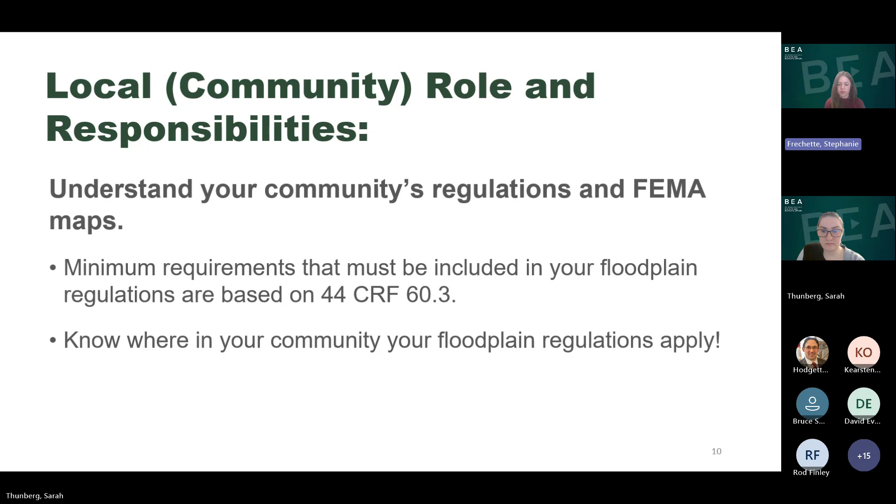Most communities in New Hampshire follow the minimum requirement that the floodplain regulations apply to all areas designated as special flood hazard areas or flood zones by FEMA's flood insurance rate maps. Knowing where those floodplains are in your community is critical as it's where your regulations apply.

Next, it's the community's responsibility to ensure that all local permits are applied for all development in the special flood hazard area. That includes the requirement that a permit issued by the community must be issued for all development in those special flood hazard areas. This does include building and non-building development as well. We're going to be talking about how non-building development is defined in just a few slides.

Additionally, for existing buildings in the special flood hazard area, ensure that a substantial improvement and substantial damage determination is being made for all existing structures when work is being performed or a permit is being applied for.

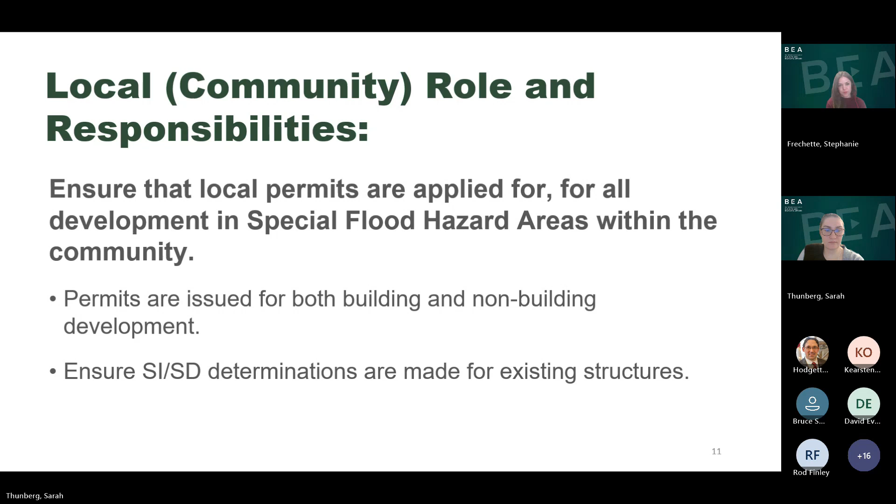Next, it's the community's responsibility to ensure that floodplain development is built according to the approved local permits and your floodplain regulations. Sometimes plans change during construction, whether intentional or not, but it still needs to meet your floodplain regulations at the end of the day.

An example is that a new structure is being built and the lowest floor is constructed an inch too short of the base flood elevation, or an existing structure is being improved that did not meet the substantial improvement threshold. But as renovations are underway, the property owner decides to do additional work that would then bring the structure to meet the substantial improvement threshold.

Finally, while it's up to the community to ensure those regulations are met, the community is responsible to gather and maintain records such as as-built elevation data for new or substantially improved structures in the special flood hazard area.

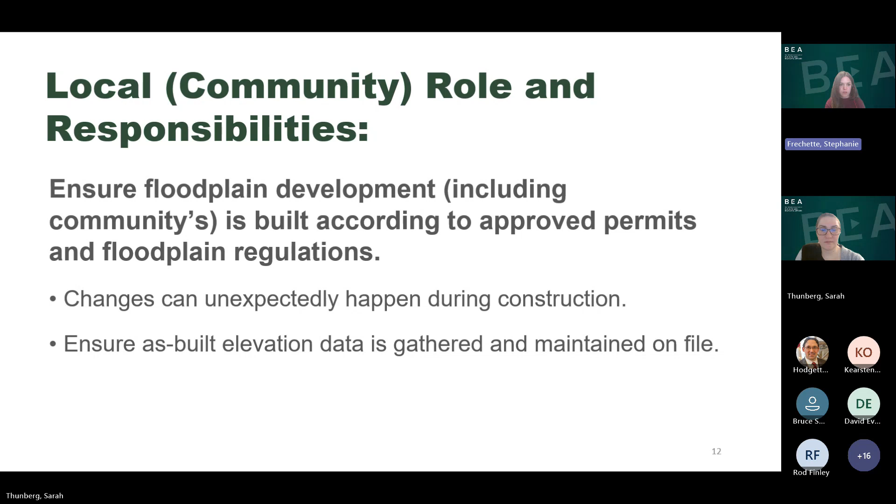Finally, the last local responsibility is that the community must take enforcement actions to correct any violations if they were to occur. Again, floodplain regulations are administered and enforced at the local level, so it's your community who's responsible for enforcing those regulations. Failure to enforce or correct any violation may jeopardize a community's good standing in the National Flood Insurance Program.

So now let's discuss some common violations. Most common violations can be grouped into two categories. One is unpermitted development in the floodplain, and the other is when development within the floodplain does not comply with the permit issued by the community. So let's get into it.

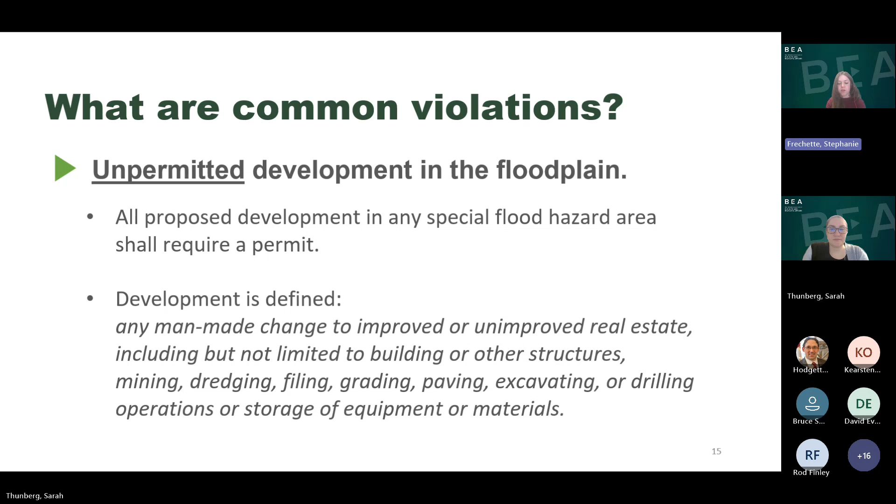The first type of common violations is unpermitted development in the floodplain. Any development in the special flood hazard area shall require a permit. Development, as defined in the National Flood Insurance Program, is any man-made change to improved or unimproved real estate, including but not limited to buildings or other structures, mining, dredging, filling, grading, paving, excavating, or drilling operation, or storage of equipment or materials. So, in summary, if any building and non-building development is happening in the special flood hazard area, then a permit must be issued.

Here are some common examples of unpermitted development in the floodplain. A common one is structures that are either being constructed or were constructed without a permit. That also means that they may not meet the building requirements included in your floodplain regulations.

Another example is improvements to structures without a substantial improvement determination. Every existing structure in the floodplain must have a determination made for any improvements that are performed. There are a few exceptions to that rule, but overall, that determination is always needed.

Similarly, repairs to structures without a substantial damage determination. Remember that needs to be made for all damage caused by any origin, not just flooding. So a fire, a tree falls on the house, a truck runs off the road into the building - that determination needs to be made. Placement of fill,

this is a common example of non-building development in the floodplain. Although it's not a structure, it needs to be permitted and meet any watercourse requirements in your floodplain regulations. And same with excavating of earth or materials and storage of equipment or materials. This non-building development requires a permit and must meet the watercourse requirements in your floodplain regulations.

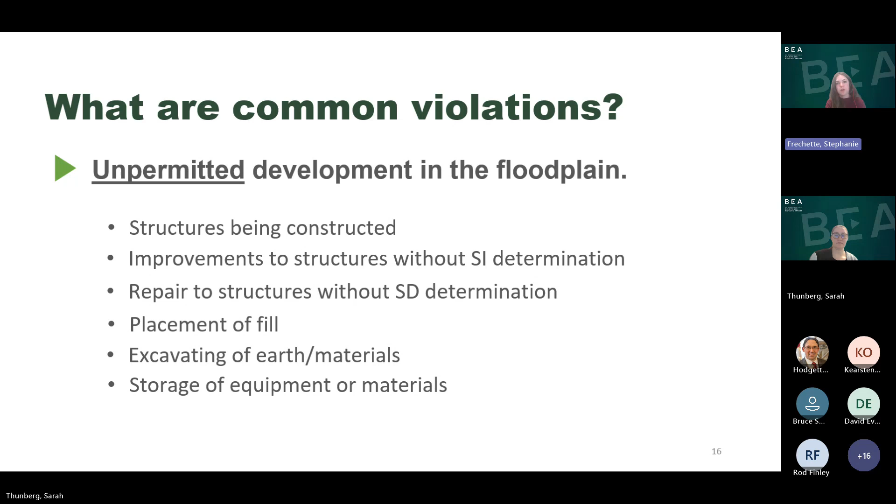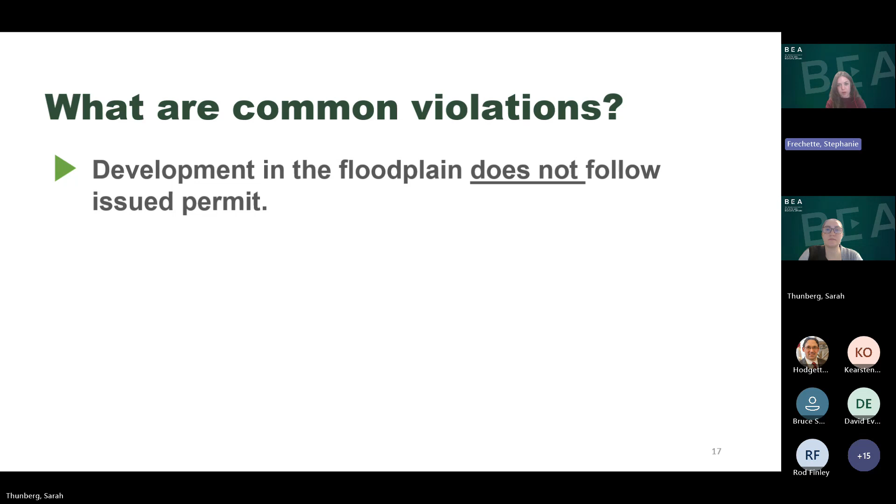The second category of common violations is that development in the floodplain does not follow the permit that was issued by the community. We're going to spend some time talking about this type of violation in the following slides.

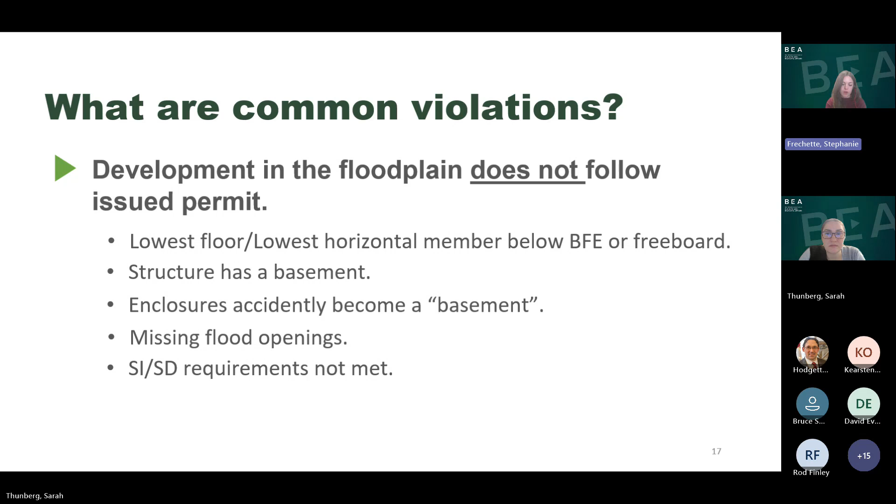A common violation is the lowest floor for A zones or lowest horizontal member for V zones is below the base flood elevation or any freeboard a community may have.

So as adopted in your community's regulations, for A zones, which includes flood zones A, AE, and AO, the top of the lowest floor should be at or above the base flood elevation or the design flood elevation if your community has adopted higher standards. For zone V, which are in coastal areas, the bottom of the lowest horizontal structure member must be at or above the base flood elevation or the design flood elevation.

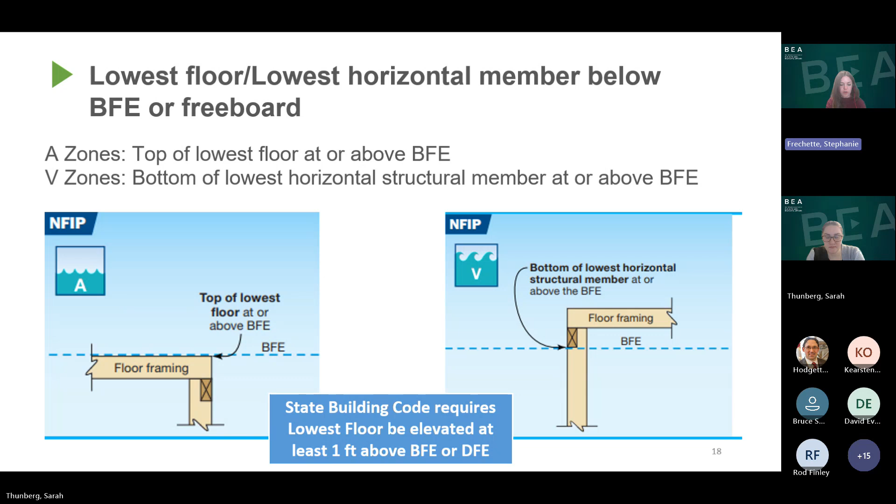Now, this is an approximate. The as-built elevation data provided post-construction by the property owner should ensure these are at the base flood elevation or higher. Also to note, for communities that have adopted or enforced the state building code, while not NFIP minimum requirements, please be aware that the code requires at least 1 foot freeboard above the base flood elevation or the design flood elevation be required for residential structures.

Another common violation is that a structure has a basement. A basement is defined by the National Flood Insurance Program as any structure with an enclosed below-grade area on all four sides. On any new construction or substantial improvement, this is not permitted in the special flood hazard area. This is to avoid a bathtub effect where water would flow in and not be able to flow out, affecting the pressure and forces on the structural integrity of the structure.

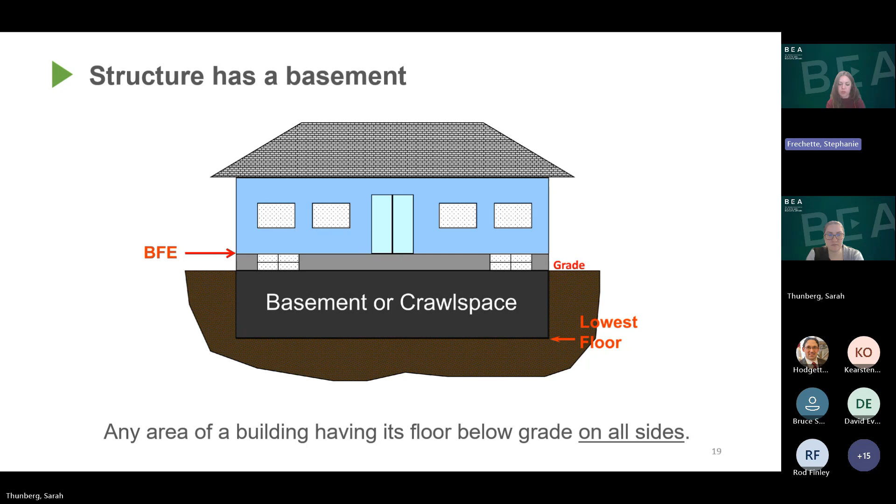Just to clarify, this is for new construction or substantial improvement of structures in the floodplain. If a structure is in the floodplain and has a basement, depending on when it was built or what work has been done, a basement doesn't automatically equal a violation. It would just be for any structure built after the community joined the program, and any substantial improvements determined on that structure regardless of age.

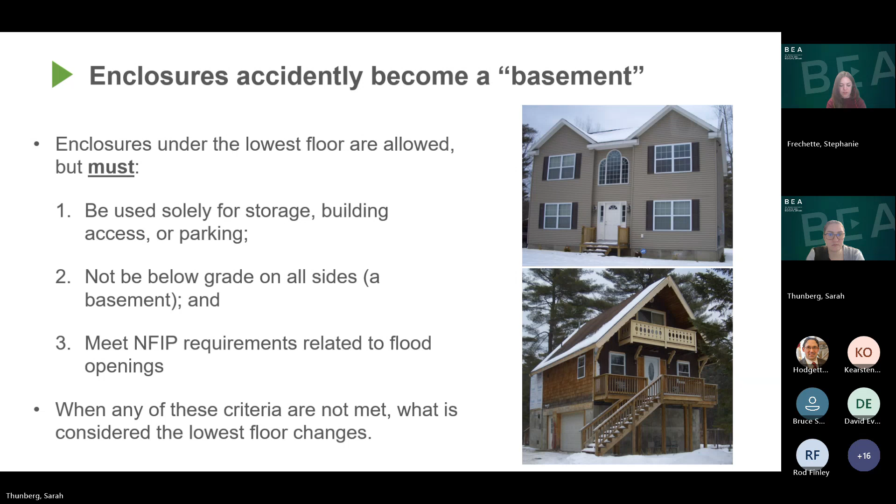For V zones, which are coastal, enclosures have a slightly different requirement. That space must be free of obstructions or constructed with breakaway walls, open lattice work, and again be used for parking, building access, or storage.

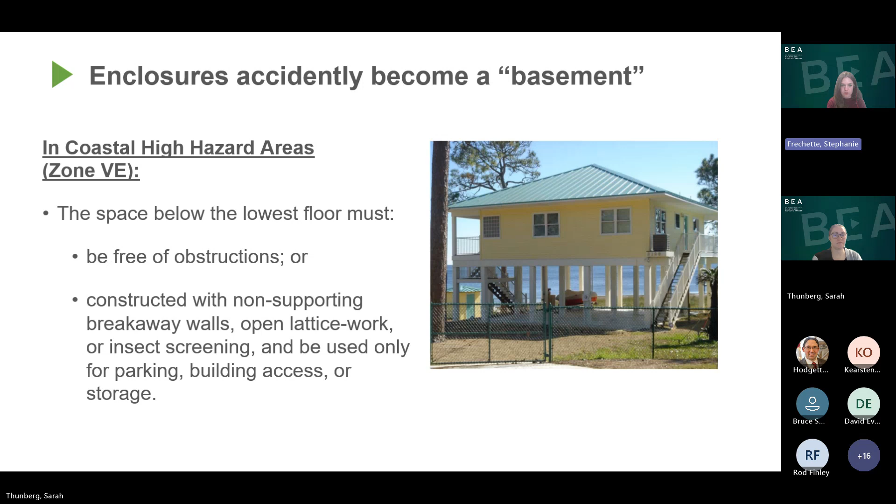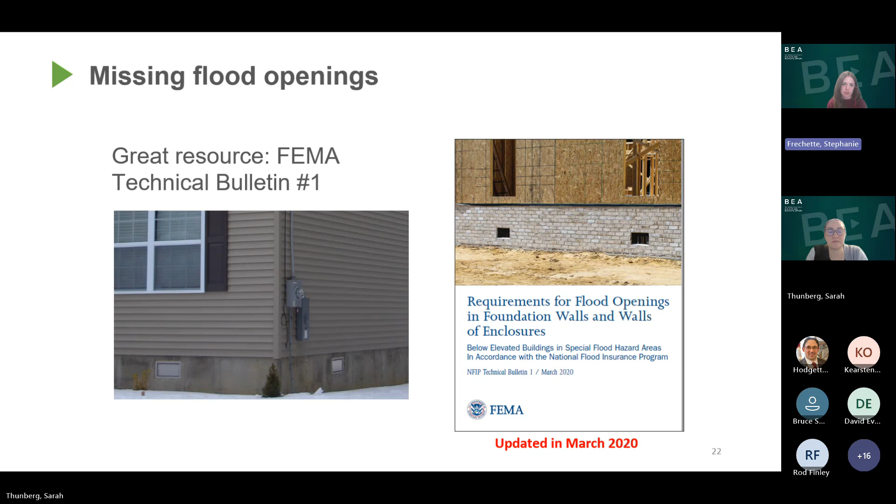Another common violation is that an enclosure is missing flood openings. If a structure is elevated to the base flood elevation or above in A zones, enclosures are allowed to be below that lowest floor with proper flood openings installed. FEMA does have some good resources on flood openings in foundation walls and wall enclosures, and we have more information on our webpage with technical bulletins that you can reference.

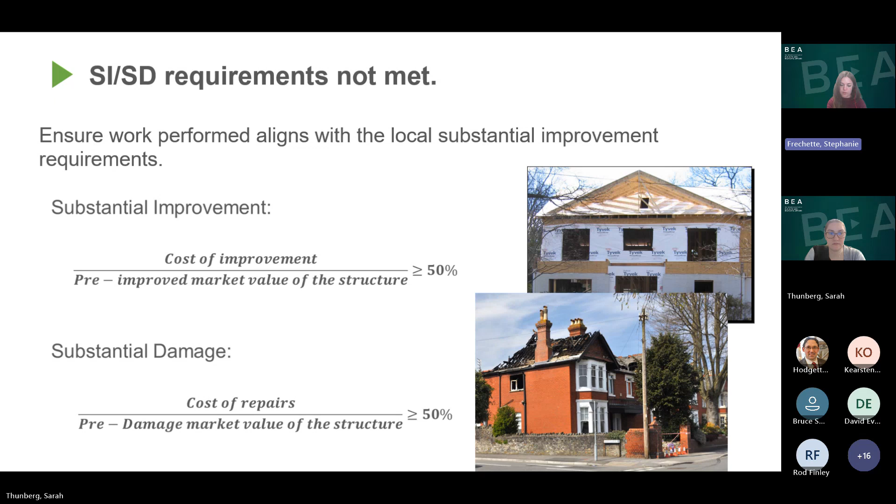You should be aware of any intentional or unintentional changes to the proposed scope of work, as that could change the determination. The substantial improvement and substantial damage desk reference is a good resource to learn more about these requirements.

The final common violation we're going to look at is recreational vehicles not meeting the requirements of your floodplain management regulations, or no longer meeting these requirements.

The rule for recreational vehicles is that they must be on site fewer than 180 consecutive days—yes, that means it can be driven off one day and back the next. It must be fully licensed and ready for highway use. These regulations are intended to ensure that if flooding were to occur, the vehicles could be moved quickly out of the area. This also means there can be no permanently attached structures to the RV either, like a deck, for instance. So if these requirements or criteria are not met, then the RV must comply with the requirements for a manufactured home.

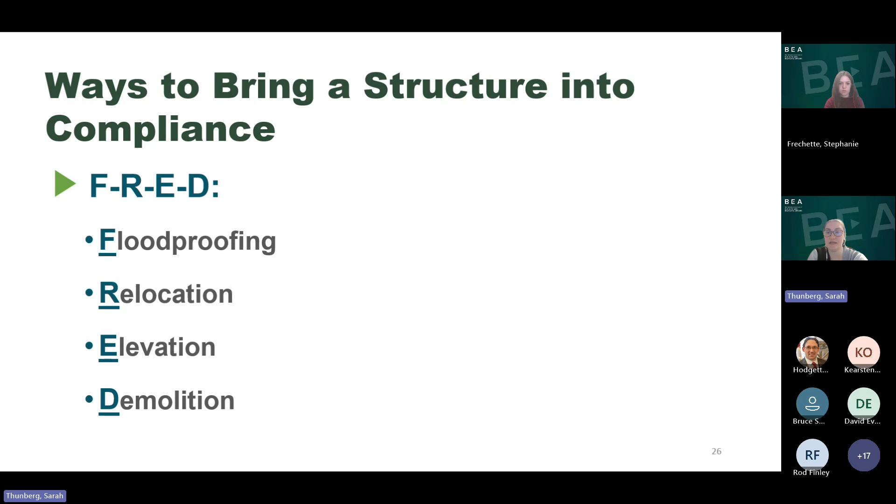So one of these four techniques is called floodproofing. There are a couple options for floodproofing depending on whether you're looking at a residential or a non-residential structure.

Dry floodproofing is primarily used for non-residential structures in A zones, while wet floodproofing is typically used for residential structures, enclosures, garages, and accessory structures. Dry floodproofing is not permitted in Zone V.

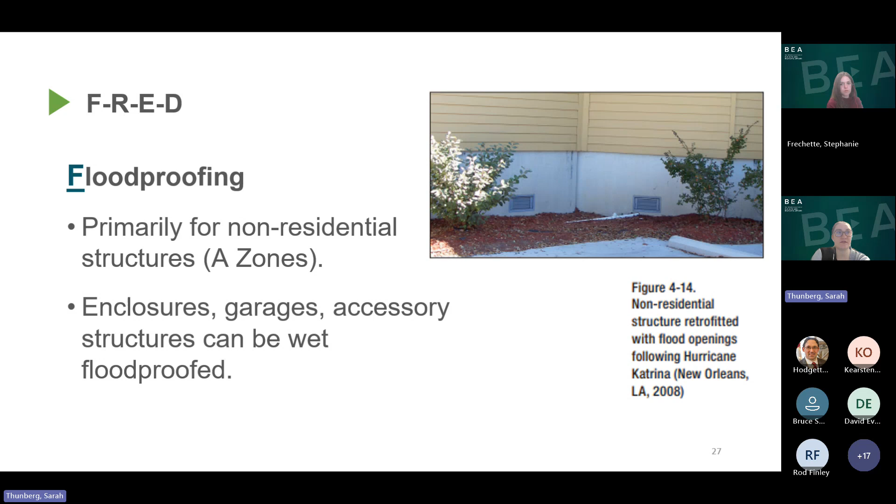However, there are some technical bulletins through FEMA that go over the best practices for dry and wet floodproofing. Dry floodproofing means a combination of measures that make a building and attendant utilities and equipment watertight and substantially impermeable to floodwater, with the structural components having the capacity to resist flood loads.

Wet floodproofing means the use of techniques that allow floodwater to enter and exit automatically to minimize unequal pressure on the walls. The structure will get wet, the flood waters will come in, but wet floodproofing offers an option for that free flow of water. Typically these are used through flood vents. And again, dry floodproofing is not an option for your coastal V zones.

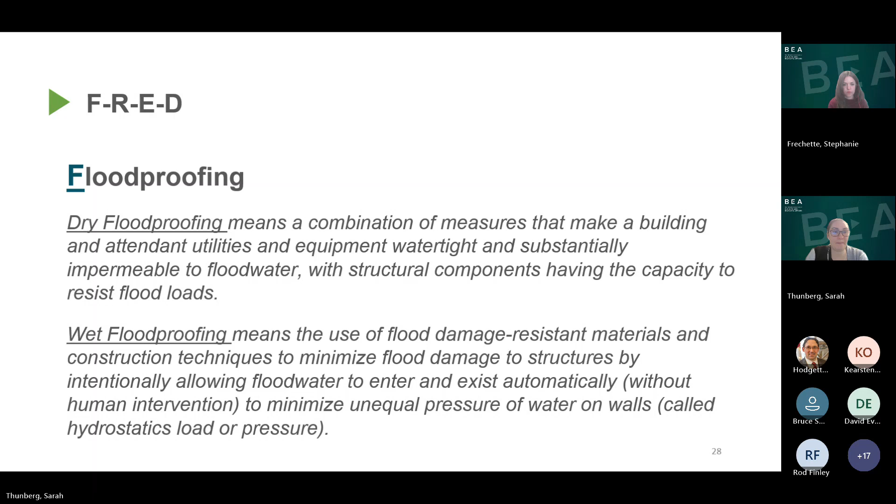Non-residential structures are permitted to be dry floodproofed through your local regulations. If so, floodproofing designs must be certified by a registered design professional, typically a registered engineer or similar. Any community should utilize the floodproofing certificate for non-residential structures for this purpose. FEMA has a floodproofing certificate for non-residential structures. If you're not sure where to find that, I believe we also have it on our website, but you can reach out to me and I can direct you to that certificate.

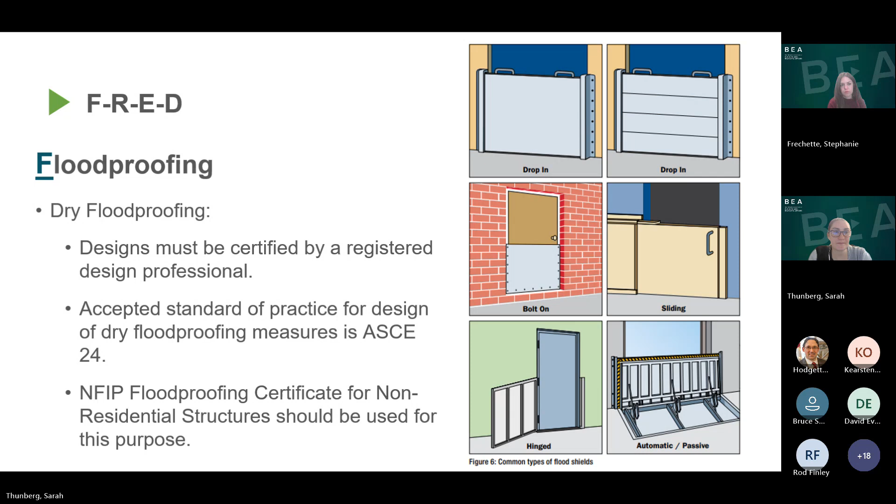Some examples of dry floodproofing methods include temporary installation of waterproof membranes to prevent water from entering a structure. So that would be if you have a mall, for instance, and you are able to put slats in the doors to prevent any flow of water through the doors. That would be one example of dry floodproofing.

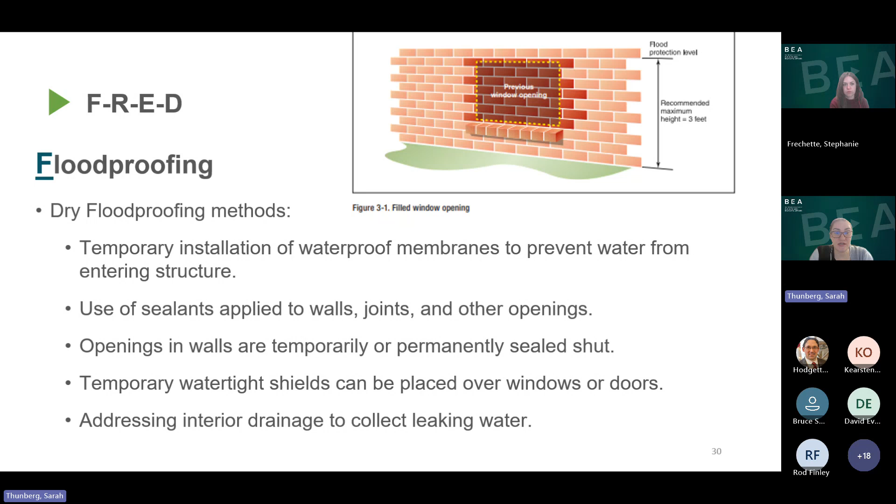Then there's use of sealants applied to walls, joints, and other openings. Then also you can have openings in walls that are temporarily or permanently sealed shut, or addressing interior drainage to collect leaking water.

Now, wet floodproofing can be used on enclosures below elevated buildings, again with the use of flood vents, as we previously discussed. Wet floodproofing can be used on attached garages, agricultural structures, accessory structures, historic structures, and for functionally dependent uses when it is authorized through a variance.

Again, the functionally dependent use is a use which cannot perform its intended purposes unless it is located or carried out in close proximity to waters. This term includes only docking facilities, port facilities necessary for the loading and unloading of cargo or passengers, and shipbuilding and ship repair facilities, but it does not include long-term storage or related manufacturing facilities.

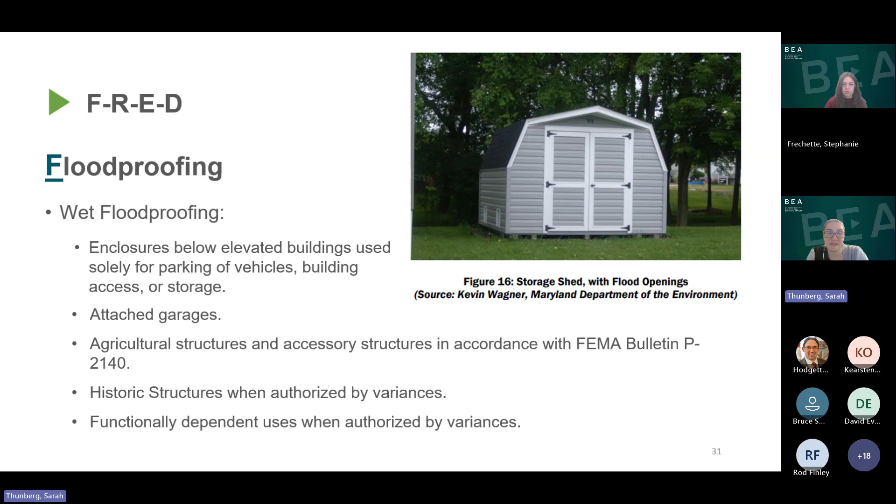All right, so let's talk about the next letter in FRED. That is relocation. Depending on the situation, relocation may be an option as it provides the greatest security when flood hazard is severe. It can also reduce flood insurance premiums, though this method may be very costly.

Relocation can be appropriate in areas where the flood hazard is severe, such as deep water, rapid rates of rise and fall, short warning times, wave action, high velocity flow, high debris potential, long duration flood events, and erosion.

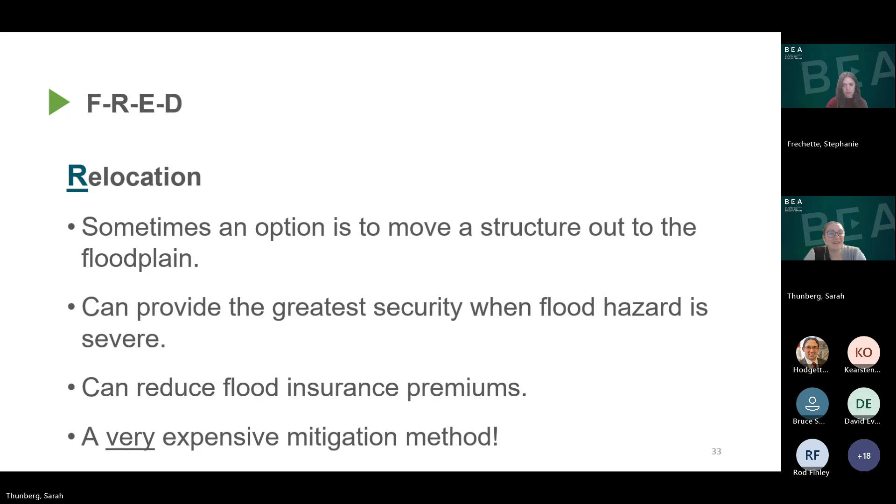All right, so the next letter that we're going to go over is elevation, E. This is to raise the building to or above the flood elevation level adopted by the community, but the building is still remaining on the lot it originally was in.

Depending on the specific situation, sometimes it's only the utilities or a portion of the structure that needs to be elevated to bring it into compliance. Typically, the process of elevating is to separate the structure from the foundations, raise it up on hydraulic jacks, and then put in temporary supports while a new or extended foundation is built below. It's a good method for structures originally built on basements, enclosures, or open foundations.

If a structure is determined to be substantially improved or substantially damaged, it may need to be elevated to be fully compliant. So this is something that could result as a requirement for substantial damage.

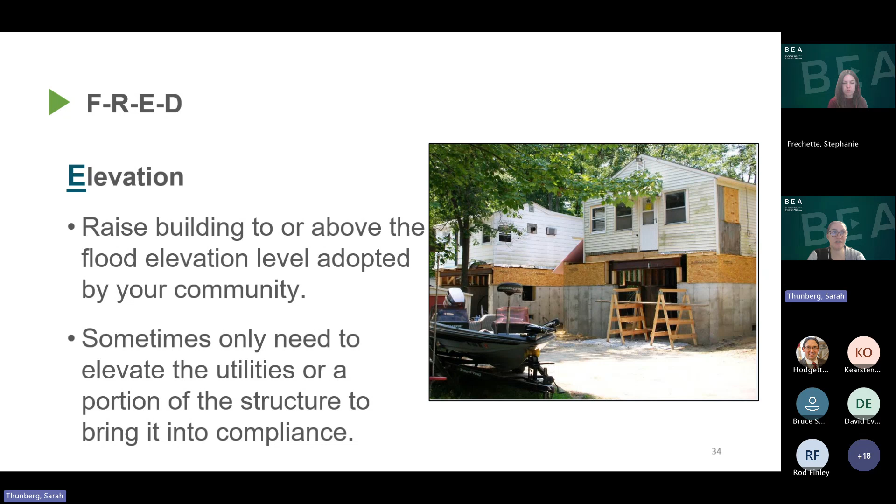Alrighty, so the last letter that we're going to go over for Fred is demolition. That's another option to reduce your flood risk. It is definitely the most extreme, because depending on the specific situation, especially if a structure is severely substantially damaged or severely and repetitively substantially damaged, this may be the easiest way to bring the structure into compliance is to demolish the structure. It can be a good option for any low-cost structures which are out of compliance, such as a shed or accessory structure. Then once it's demolished, if chosen by the property owner, a new compliant building can be built back in place, as long as it is raised and fully compliant with the community's NFIP regulations. This can involve filling in a basement, grading, and landscaping.

Also available to all NFIP policyholders is something called the increased cost of compliance, which can provide, I believe it's $30,000 for mitigation measures to bring structures into compliance. This is only available to structures which have been substantially damaged and there is a hardship, and the homeowner would not otherwise be able to bring the structure into compliance. The increased cost of compliance is some money available through FEMA for substantially damaged structures. But this is still an option on top of any insurance claim that they may receive for substantial damage.

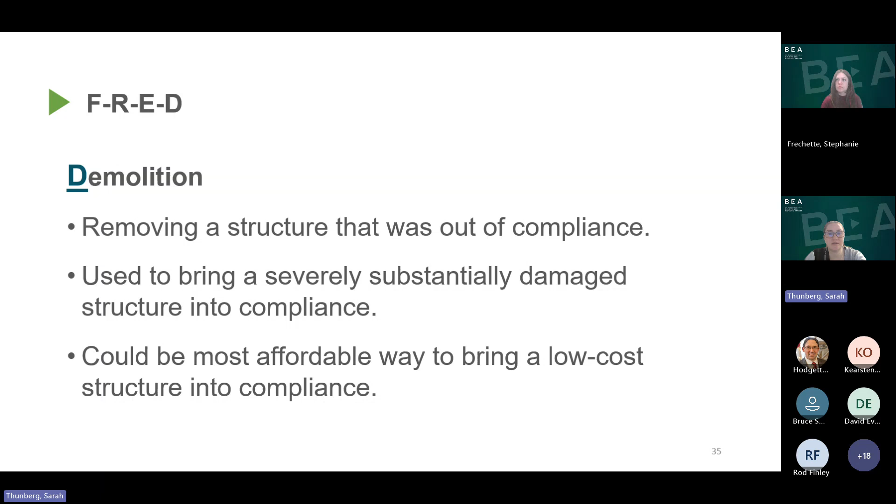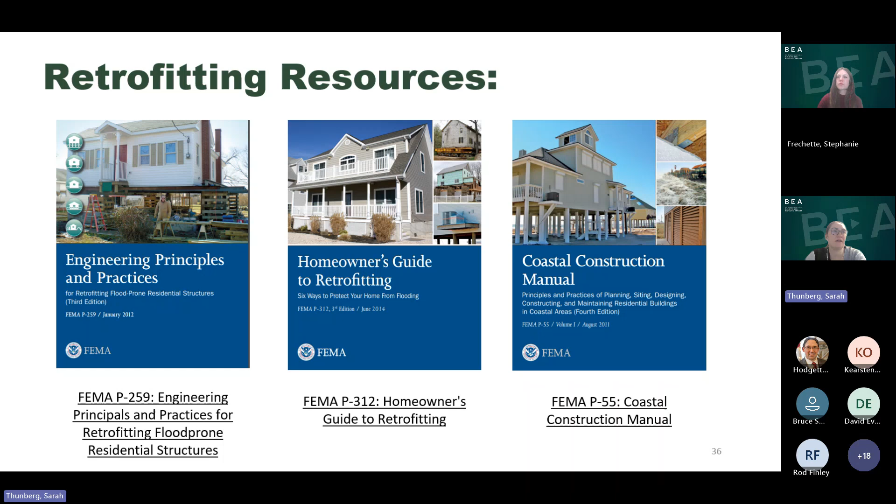All right, so some other tools that communities have for compliance is, well, first off, the biggest tool you have is to know your ordinance. These are your community's floodplain regulations. And while you don't need to know every property off the top of your head, you need to make sure that you know how to make a determination of if that property is in the floodplain, especially if it's near but you're unsure if it will be in the floodplain. Make sure that you have procedures written down to be able to verify whether or not there will be any floodplain interaction with the structure.

Also remember that FEMA is the only entity that can change the floodplain maps. I'm sure we've all heard, even myself, I get these calls almost on a weekly basis saying, I've lived in my house for 40 years, it's never flooded, the river's never come up near my house. But that doesn't mean that they're exempt from your local floodplain regulations. Only an official letter of map change in the form of a LOMA from FEMA can remove the property from floodplain regulations. That doesn't mean that you cannot build in the floodplain. You are allowed to build in the floodplain. That's why communities have regulations for how high can you have a basement. So this does not mean that you cannot build in the floodplain, but if someone is trying to get themselves removed, only FEMA is able to do that.

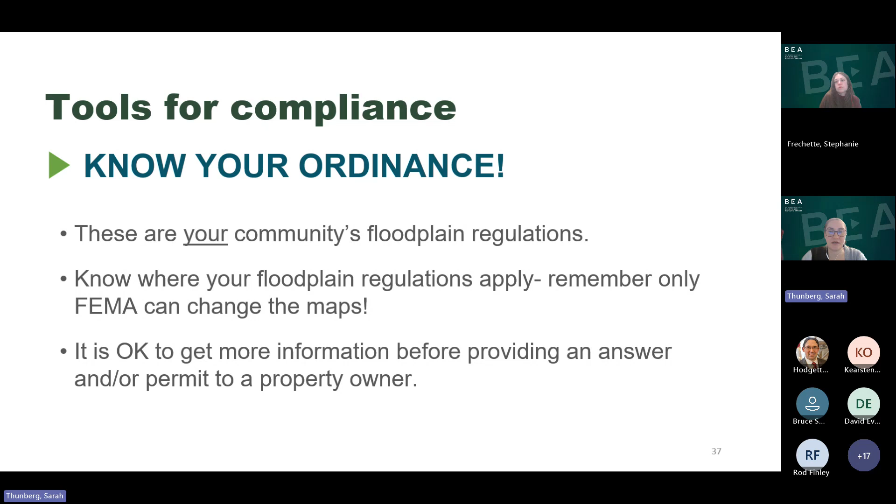There are also, as I've kind of said, a lot of FEMA publications and resources for making substantial damage and substantial improvement determinations. And yeah, so I believe on our website, we should have a fairly comprehensive resource page with all of the technical bulletins and different guidance documents that the state of New Hampshire has put out.

All right, so there's some other tools at your disposal to use. There is other documentation a community can require to help ensure structures are built and remain in compliance. The first is the community can consider adopting and requiring a non-conversion declaration for structures with enclosures below the lowest floor. This form could be completed by the property owner and kept on file for that property. If a community wanted to adopt this, I would recommend working this into some type of procedure that is followed, and then just being consistent with all property owners in the special flood hazard area moving forward. And that is key. You do want to be consistent from permit to permit, and make sure that you are scrutinizing every project equally.

Another document is what's called a no-rise certification. This is so development, both building and non-building, is only permitted in the regulatory floodway where there is no official or no rise of the base flood elevation. That does typically require a hydraulic and hydrologic study to prove, but this certificate can be another tool used to ensure that the community is meeting its floodplain regulations.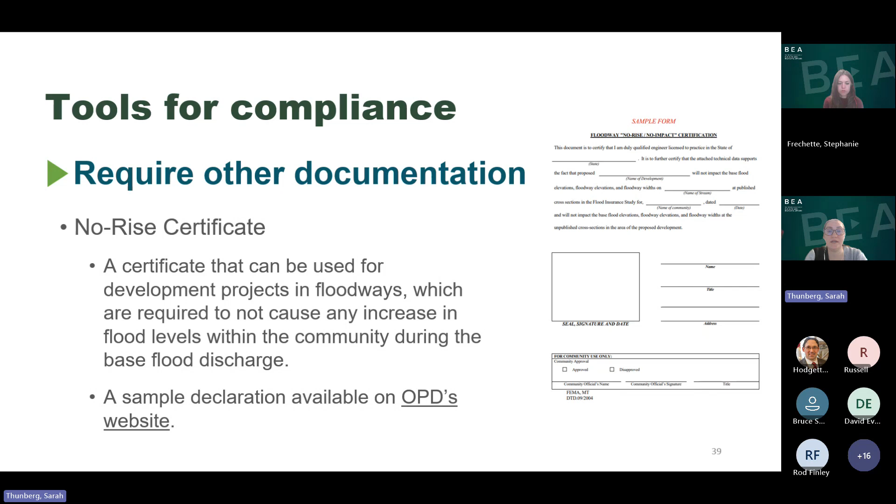As before, I would recommend that if a community chooses to adopt this form, have written procedures in some internal database, just noting the starting date of when you are using that as standard policy, and be consistent moving forward on when you require these certifications.

Another document that can be used is a flood opening certificate. This is to be used in situations where it is not feasible or desirable to meet the minimum opening criteria as detailed in a community's floodplain ordinance. This document, like ones before, must be signed and certified by a licensed professional.

All of these documents, since they are signed by a licensed engineer or surveyor, are ultimately the documents that your community has in your back pocket in case any issues arise with any of these structures. For some reason, if anything goes to court, these are your defense documents to ensure that you permitted and the community did all of their due diligence in permitting this.

The last document that I want to go over is a V-Zone certificate. It's a certificate that can be used to ensure that all new or substantially improved buildings in V-zones are designed, and the methods of construction to be used are in accordance with accepted standards of practice for meeting the provisions in a community's floodplain ordinance.

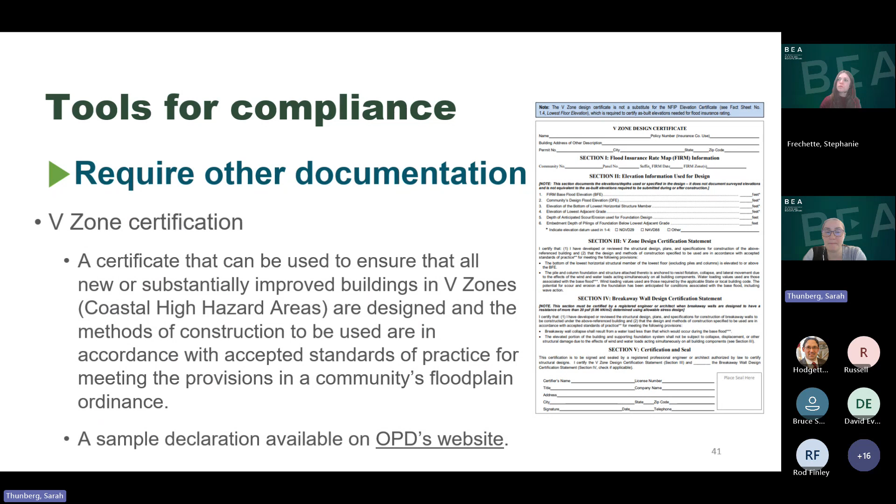Inspections are another tool that communities have to ensure compliance. It's often a way to catch compliance concerns earlier than once the building is completed. Typically, the best practice is to conduct a first inspection with plans in hand. You should determine that the site as identified on the proposed plans is consistent with the actual ground conditions.

Then a second inspection would need to ensure that the lowest floor will be built at the height stipulated in the permit application, and that the foundation is the type specified in the plans. Once the foundation is poured or laid, it can be very expensive for the property owner to change the building location or the elevation of the lowest floor.

Finally, the third inspection is done as the project is nearing completion. It ensures that the foundation and floor elevation have not been altered. It is also where you would want to obtain an as-built elevation or floodproofing certificate, verify that any enclosures below the lowest floor have adequate openings, check for floodway encroachments, and then also for V-zones, check if there are breakaway walls.

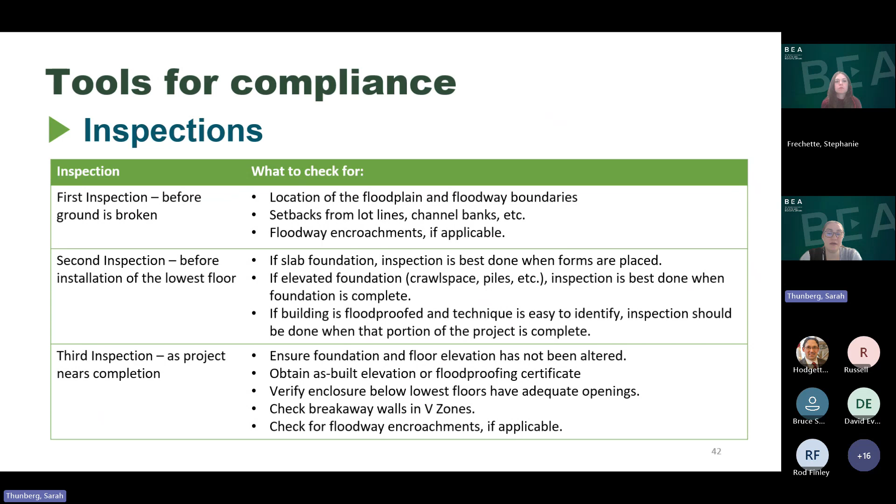I would also recommend considering taking photos during the final inspection to document compliance and retain them in your community's permit records.

You also want to think in the mindset of the property owner. The goal is compliance, but for the property owner, that could mean they only see dollar signs. Some tools you can use to incentivize property owners to bring their structures into compliance: first off, it's for their own personal safety, and your house will be better protected from flooding. You're hopefully saving money by not having to rebuild or fix damages due to flooding. It's also better resale value, and your flood insurance rates, while based on many factors, will mean lower insurance rates when building into compliance.

All right, so we're going to talk about some legal stuff now. The legal tools that your community has are typically in the form of fines, stop work or cease and desist orders, and also just withholding a certificate of occupancy.

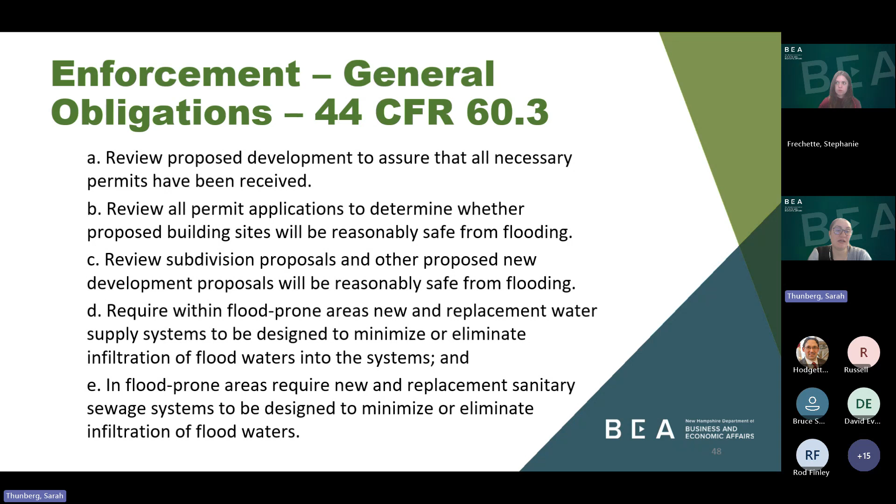You also want to require that all new construction and substantial improvements of residential structures within Zones A, used to be called A1 through 30 - there are still some A1 through 30 zones in New Hampshire, but they are mostly all getting converted into Zone A or AE at this point - have the lowest floor, including basement, elevated to or above the base flood level.

You also want to require that all new construction and substantial improvements of non-residential structures within Zones A1 through 30, AE, and AH have the lowest floor, including basement, elevated to or above the base flood level, or together with the attendant utility and sanitary facilities.

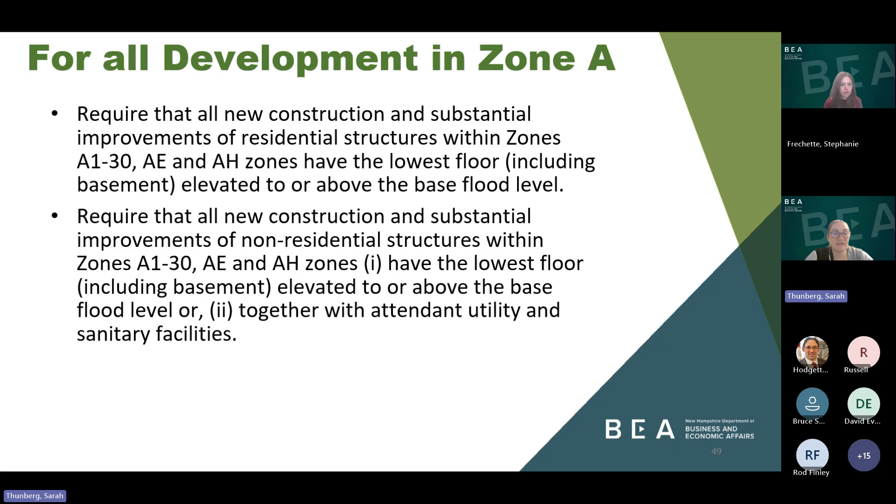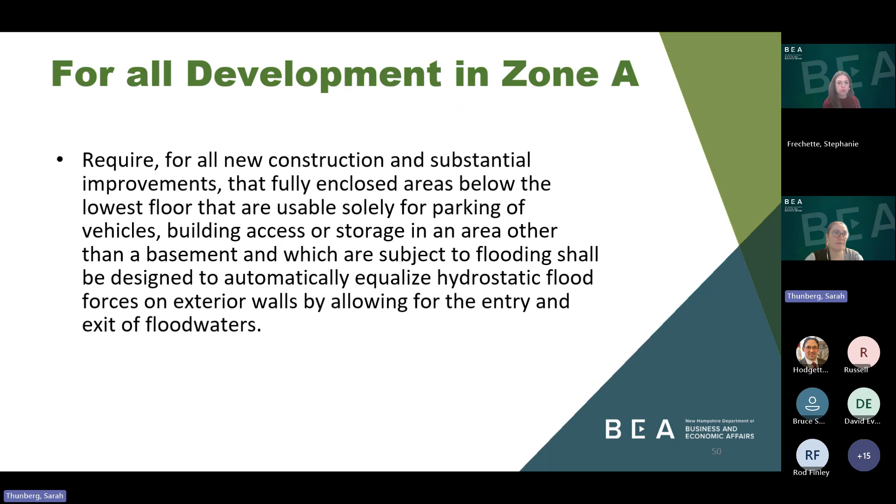There's also the requirement that for all new construction and substantial improvements, fully enclosed areas below the lowest floor that are usable solely for parking of vehicles, building access, or storage in an area other than the basement, and which are subject to flooding, shall be designed to automatically equalize hydrostatic flood forces on exterior walls by allowing the entry and exit of floodwaters - that is the bathtub effect, or trying to remedy that bathtub effect that Stephanie had mentioned earlier.

Communities should also require that manufactured homes placed or substantially improved within Zones A, AH, and AE be elevated on permanent foundations such that the lowest floor of the manufactured home is elevated to or above the base flood elevation, and be securely anchored to an adequately anchored foundation system to resist flotation, collapse, and lateral movement.

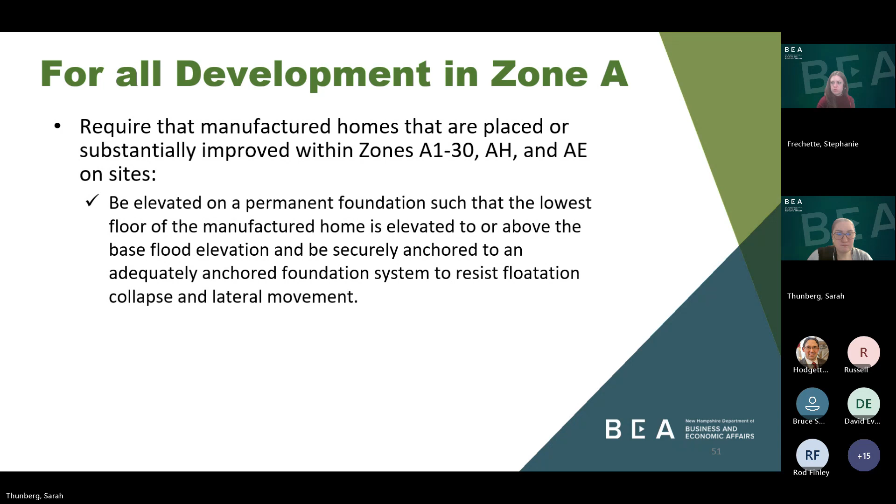All right, so you also want to require that recreational vehicles placed on sites within Zones A, AH, and AE are either on the site for fewer than 180 consecutive days, or be fully licensed and ready for highway use, or meet the elevation and anchoring requirements for manufactured homes. A recreational vehicle is ready for highway use if it is on wheels or a jacking system, attached to the site only by quick disconnect type utilities and security devices, and has no permanently attached additions.

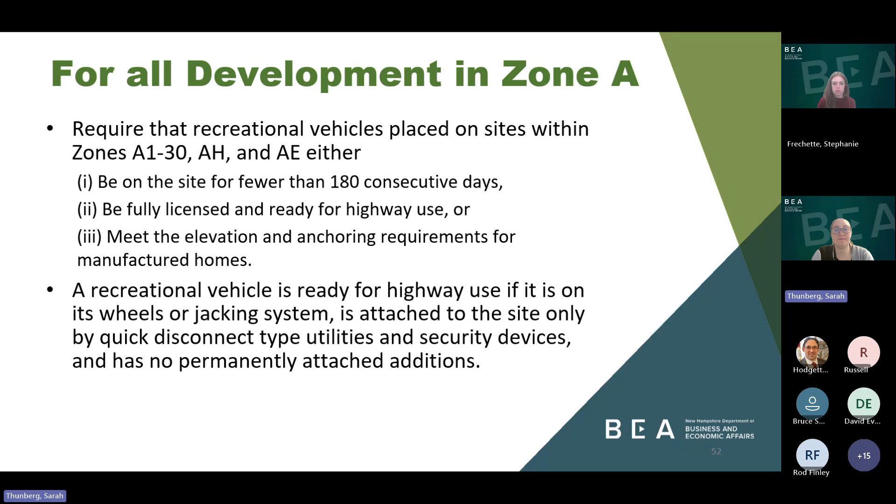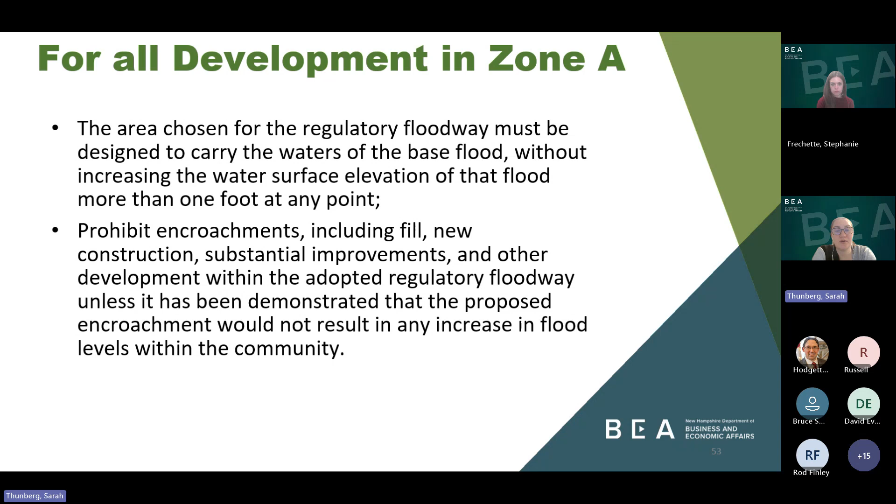All right, so we are a little early today, actually.

So the key takeaways from today are to know your community's floodplain regulations and get familiar with the guidance resources available. Also use the sample and template documentation when available, and adapt the procedures for consistency. And if possible, try to find violations earlier when they are easier to correct, preferably during construction or before construction.

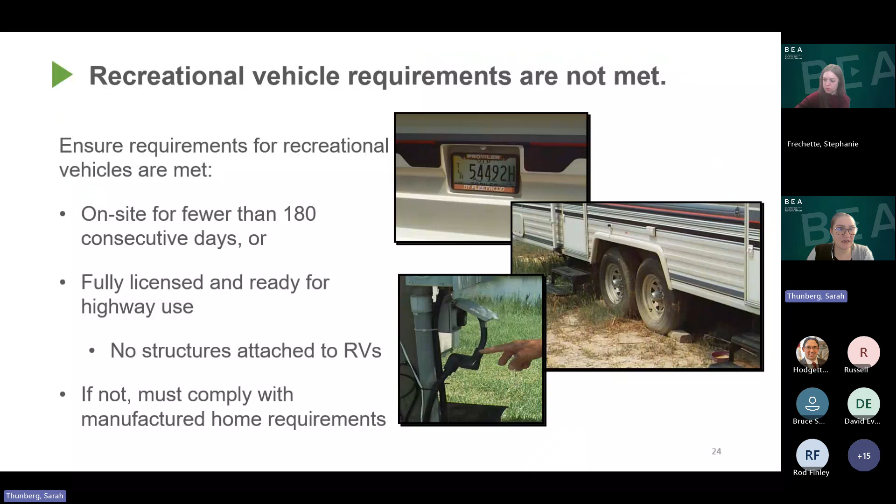What about cutting trees in the floodplain? I'm not quite sure on that one. Development in the floodplain is not just structure, it includes things like filling, dredging, mining. I don't remember logging specifically being included in that list, but it does seem like it is something that would likely be considered some kind of terrain alteration. So I would check with your local building inspector before doing tree cutting in the floodplain to see if they would be considering that as development. Let me go back to the slide that listed out all the types of development. But no, I don't think we included that one.

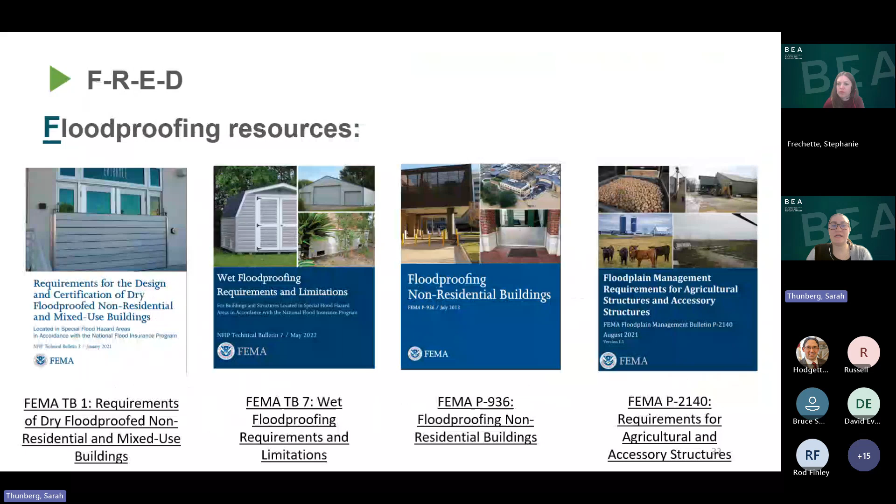Okay, sorry, I'm just going to go through the presentation really quick here. I hope I'm not giving anyone a headache. Okay, so I saw another question in the chat.

Is a basement used as a living space or storage in a floodplain if it is enclosed and houses a washer, dryer, and freezer, for example? If there's utilities, and I would consider those appliances utilities, it likely would be classified as living space in that situation. I believe storage is specifically for things like wood piles and your car, maybe a lawnmower, but washer, dryer, and freezer are more, with the electricity, that makes me think they would be more considered as utilities.

But there are options for you to put the washer up on some cinder blocks, so it's raised up from the floor about 2 feet. I have seen some instances of that. But yeah, I'm sorry, I think that would be a question for your local building official as to whether or not they would classify that as a basement.